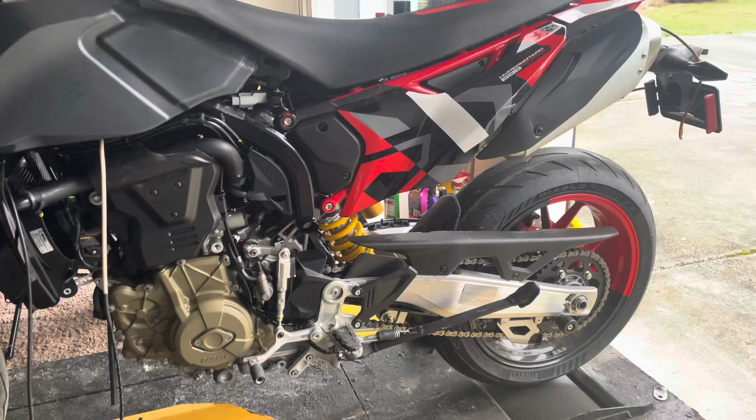Hey everybody, David from Flashed by Vcyclenut here. Got the 698 Hypermotard up on the dyno, getting some baseline numbers for us.

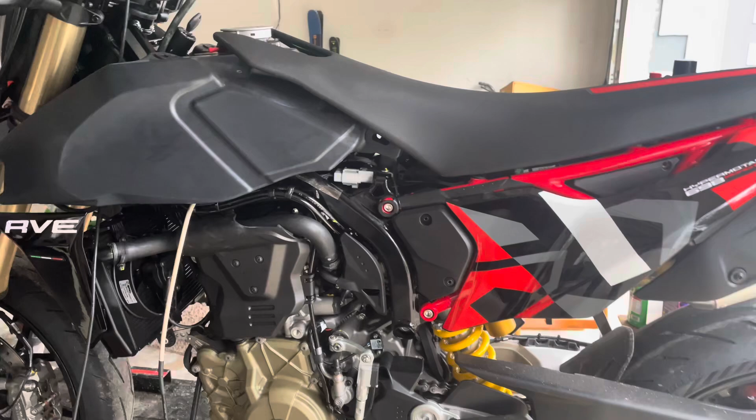So if you see, I got the side fairings off. That's because I had to take the tank off to actually get a good tach lead so we can get a good RPM signal. I left everything intact. I'm sniffing it out the exhaust instead of removing an O2 sensor to put the wideband right in the exhaust this way. Everything's exactly as it comes from the factory. Nothing's disabled or detached, so the runs that we get will be appropriate.

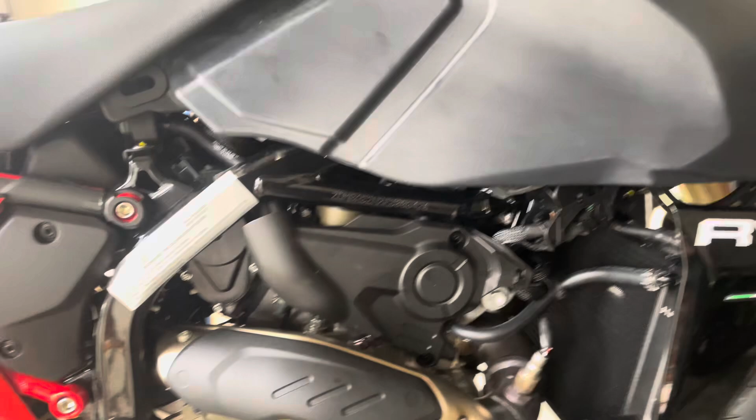In case anyone was wondering, the ECU is not too bad to get out. You do have to remove the tank like I did, and then it's just up under there. So I did remove it, take it out, and send a couple pictures to Woolich, hopefully to speed that process up.

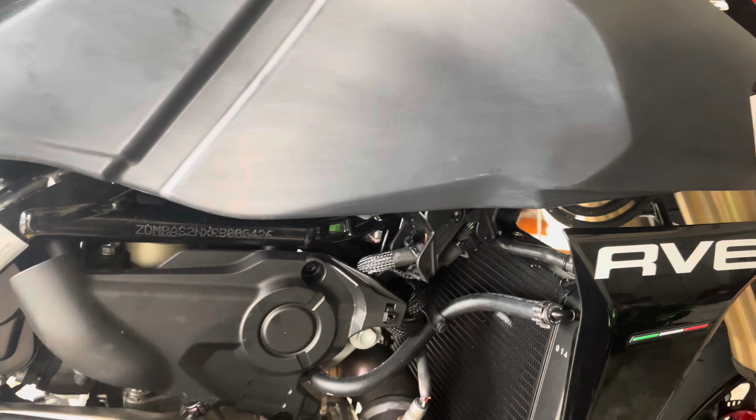As you're going to see, it ain't great as far as tuning stuff. So definitely huge room for improvement.

So a couple things I want to point out before we get to really looking at and talking about this dyno run. First was the nice soft rev limiter. You could really hear it kick in on the first video where it just kind of held it right at redline, nice and soft. That was really nice instead of falling on its face.

The other thing is, because this tach lead was kind of a pain in the butt to get to, I'm sure there will be people that try to cheat and not get a tach lead hookup, and they'll use something else as a way to calibrate off RPM on the dyno, and it's never accurate. So pay attention if you're looking at other dyno runs, make sure the redline looks right. If not, just ignore the torque numbers. The horsepower number will still be okay, but the torque number will be bad.

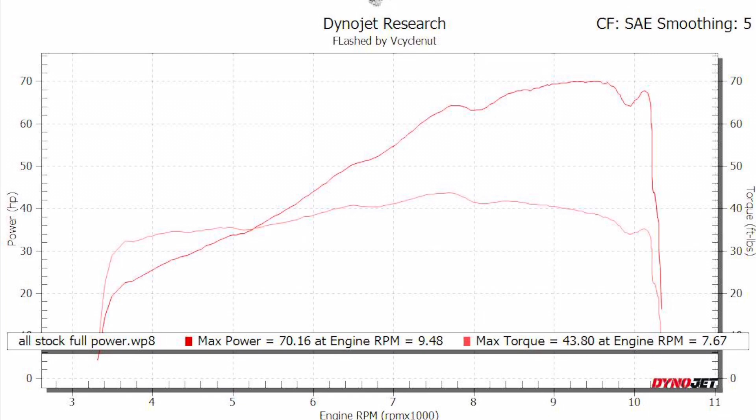So, to the run. I normally post my dyno runs with standard correction factor because my dyno tends to read a little low. But since this is, as far as I know, the first in the world of anybody releasing rear wheel dyno numbers with it, I wanted to do SAE because I know that's the standard. And if I didn't, people would complain.

So there we go, SAE: we got 70.1 horsepower. So Ducati wasn't lying when they said 77.5 at the crank. We normally estimate between 10 and 15% loss, and we're a little bit less than 10% under that number. So that's a little stronger than I expected — I expected it in the high 60s.

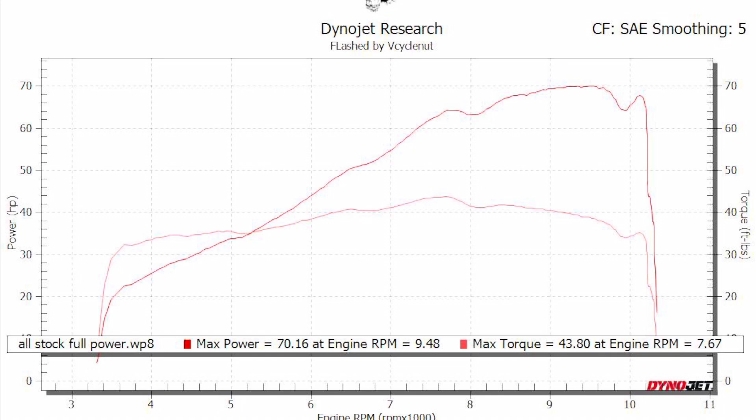The curve, not so great, right? I'm going to show you a couple things and do a lot deeper analysis with this, show you some air-fuel ratios and some of the stuff that's going on here. But you can tell at the top where it dips around 8,000, it felt like ignition timing, because you could actually feel the bike stumble. And then at the very top, I think that's probably a combination of throttle mapping and also some ignition timing restrictions that give us that dump.

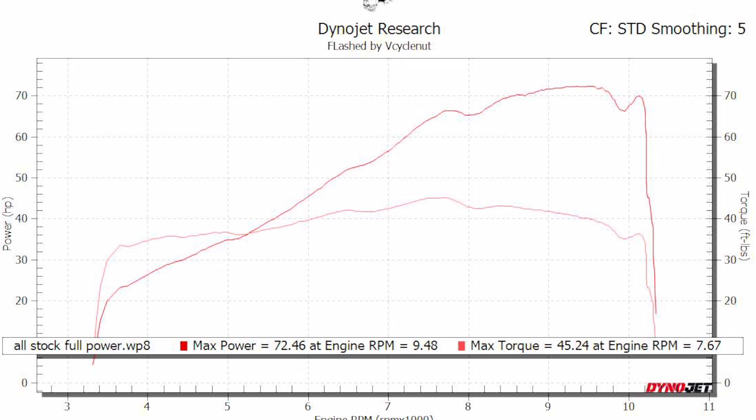So let's look at what this would look like — what I think you're going to find is the average of what people put out — because I'm going to show you STD, standard correction factor. And when we look at it in standard correction factor, it comes up to basically 72.5. Now, like I said, I've been using my dyno a number of years; it tends to read a little bit low. I'm guessing that if we're lucky enough to get 10 different places to dyno it on a typical Dynojet inertia dyno like mine, this would be around the centering mark of what we'll see. So either way, somewhere between 70 and 72.5 horsepower — pretty damn good for a stock single that is fueled poorly.

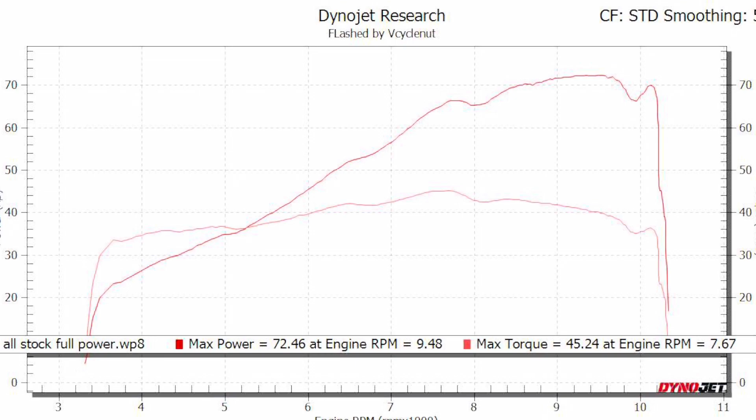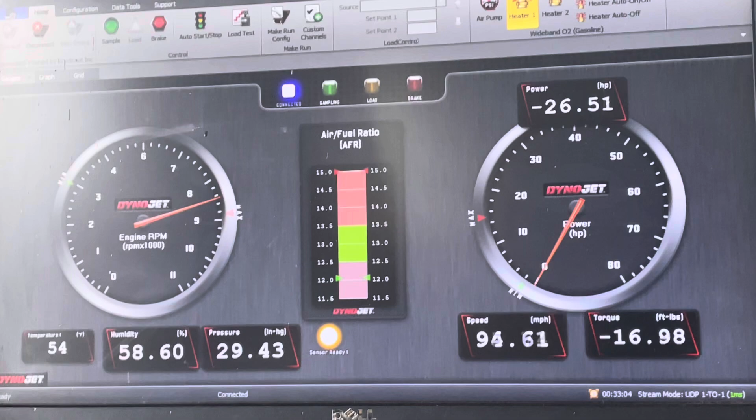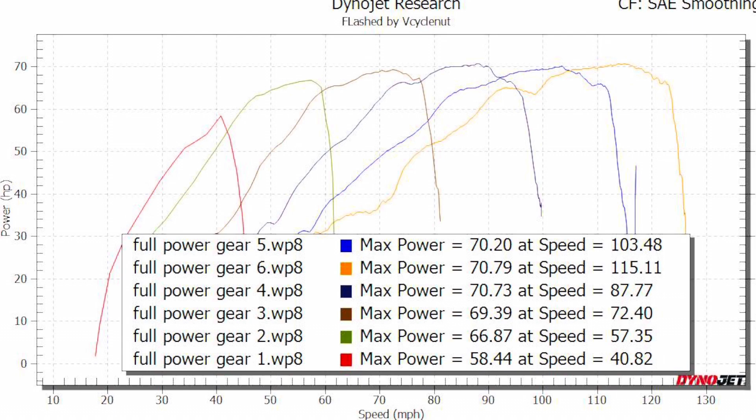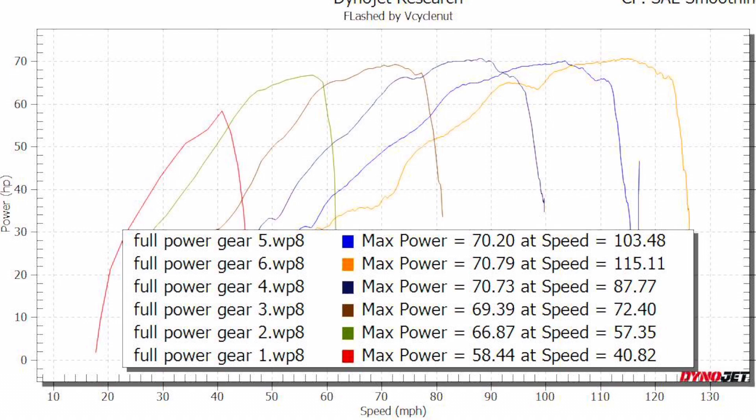Well, that was impressively bad, wasn't it? It's amazing this bike runs as well as it does with what I've seen with the air-fuel ratio. Now I like to remind people the dyno's not perfect for the test I just did - the load is almost nothing, so the air-fuel will be a little different if we did this data logging it on the road, but it gives you the idea. The thing is just not fueled properly. I'm surprised it feels as good as it does with that fueling.

So this next run here is an all-gear run. You can see besides first gear, they're all pretty close - no real restrictions in any of the gears. Maybe gear one, sometimes gear one's so hard because it just spins up so quick. But I did want to be able to get this so that after I tune it, we could see what kind of improvements I make in these lower gears. Otherwise, I'm impressed there's no gear-based restrictions that are worse per gear. You can see this is speed-based, because if I put them at RPM they'd all just lay over top of each other - you wouldn't really be able to make sense out of it.

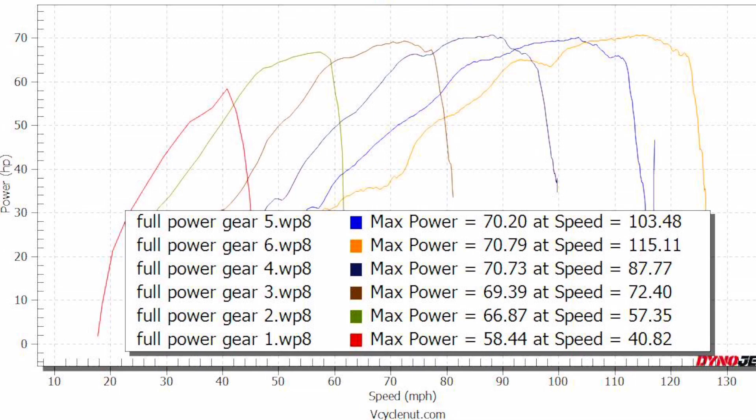And we can see, if we look at the bottom in the top 6th gear run, we got to about 125 miles an hour. So if this bike hits redline in top gear, theoretical top speed is 125 miles an hour.

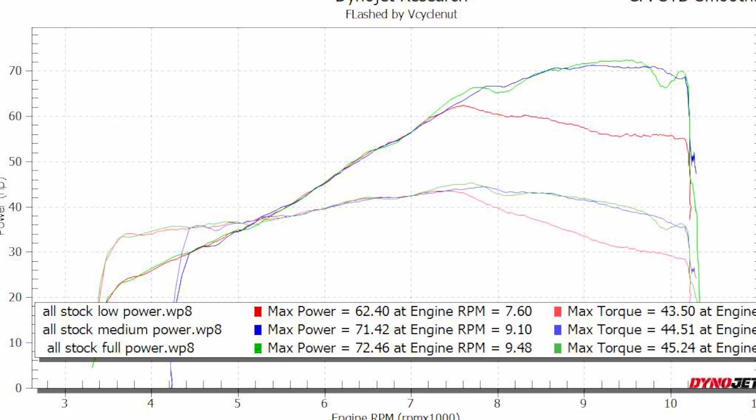And lastly, let's just take a look at all the modes. Full and medium power basically are the same, and then low power mode is greatly reduced. We can see where it just starts cutting it, and I'm sure there are throttle restrictions that kick in right around 7,000 RPMs. I kept having issues with it in medium power mode where I couldn't get it to come out of closed loop, or having the O2 sensor on too long, so I was actually able to get it a little bit better by starting to run it a little later. So that's why, if you're paying attention, you'll see medium power doesn't kick in until 4,200 when I hit the gas, but no big deal.

So medium power and full power, the only difference is how they feel. Like I said in my previous video, I still feel that full power is not aggressive enough on the throttle, but it might just be that fueling that's making it feel that way. I won't really know until I'm able to tune it, because when we have air-fuel ratios in the high 14s like that, throttle response is going to suck.